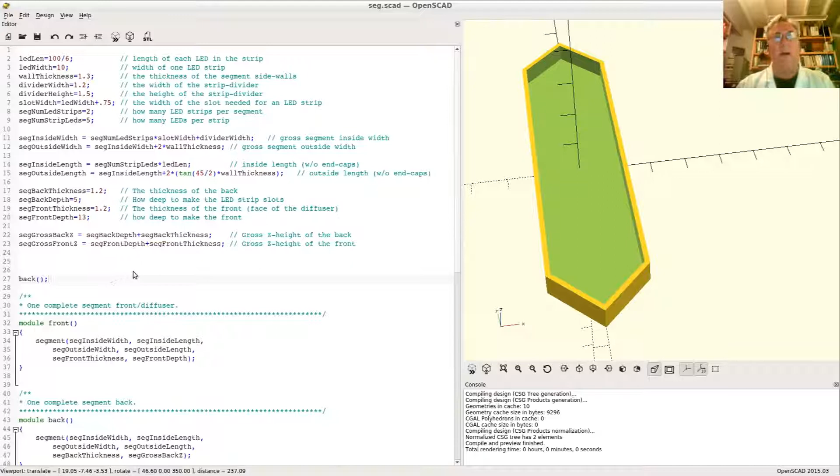How to design one so you can print it anyway. We're still in the design phase here. So here's where we left off. I added a little bit of doc to some of the functions that I didn't doc last time. And we're previewing the back of the segment here.

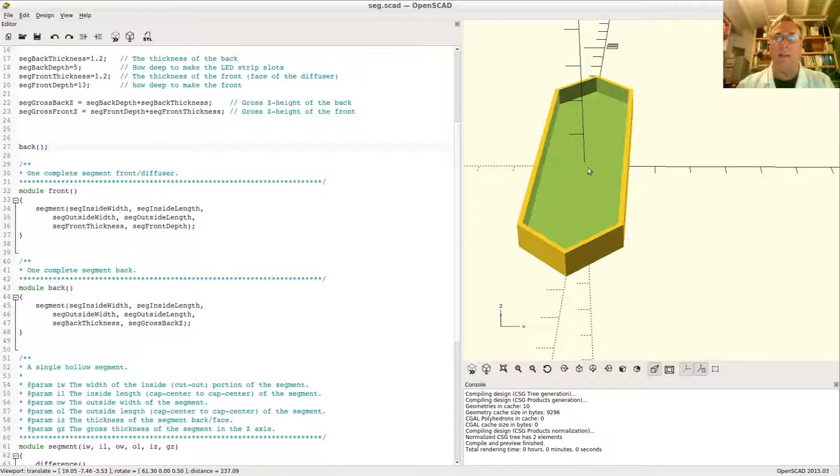Okay, so what I want to do in this segment is add the divider in here for the two strips that go in here so that the strips don't move back and forth or up and down. So in the back, it's relatively easy to do the basic thing that we want to do. So what is that? It's going to be a cube, essentially. And let's put it on center. Make it a little bit easier to keep the thing aligned right. And that's going to be...

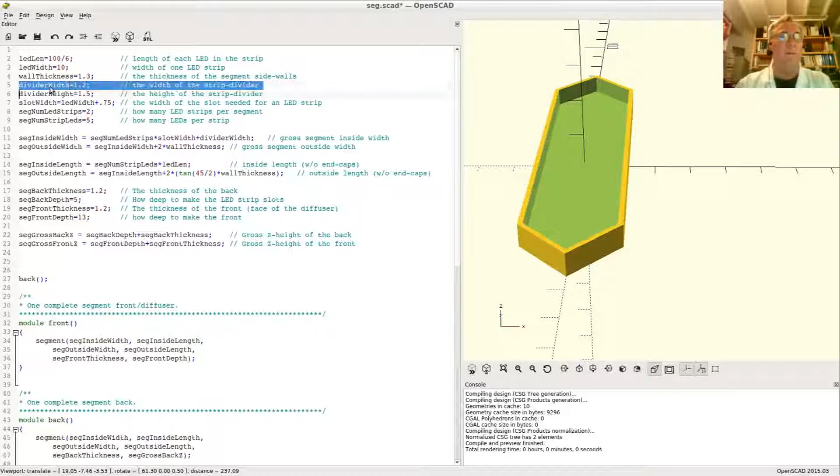I didn't mention last time, I added a divider height variable along with the width from the introduction there. So I got a width and a height. So the width is going to be the fatness of the thing in the x-axis. The y is going to be the length of the divider, which is going to be the inside length of the segment. So we have that right in here, the outside inside length right there. And the z is going to be the divider height that I just mentioned. I added up here.

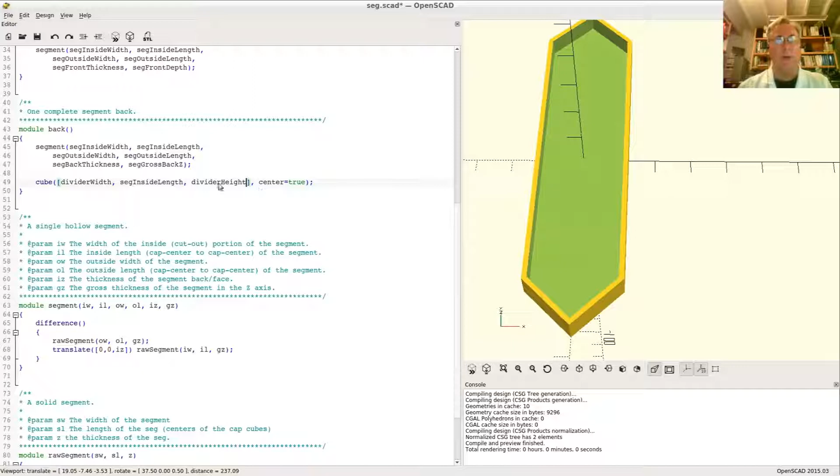Now, because we're centering this, it'll be printed centered on the origin. Let me put a marker in here. Let me highlight this, little debug highlighter. As you can see, it's not in the right spot. I got to lift it up in Z, but the question is how much. I need to lift it up more than the back of this segment. Here, let's do this just for fun. Let's do a difference here. Let's put like a cutting plane in here.

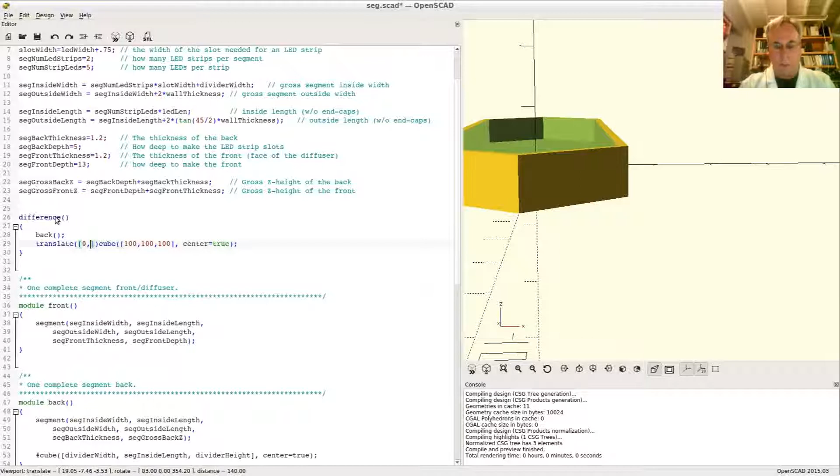Let's take the back that we're rendering now and subtract a cube from it that is 100 by 100 by 100. Center equals true. Then we'll translate it to where I want it to go. In X, we'll leave it alone. In Y, we'll move it towards ourselves, 50, so it will be in the foreground. What we're going to do is cut off this bottom half of the segment right at that axis there. And then the Z, we'll leave that alone. This should do it, right? Oops, I went the wrong way. I got to go minus 50. Fine. So now you can see where this shape really is.

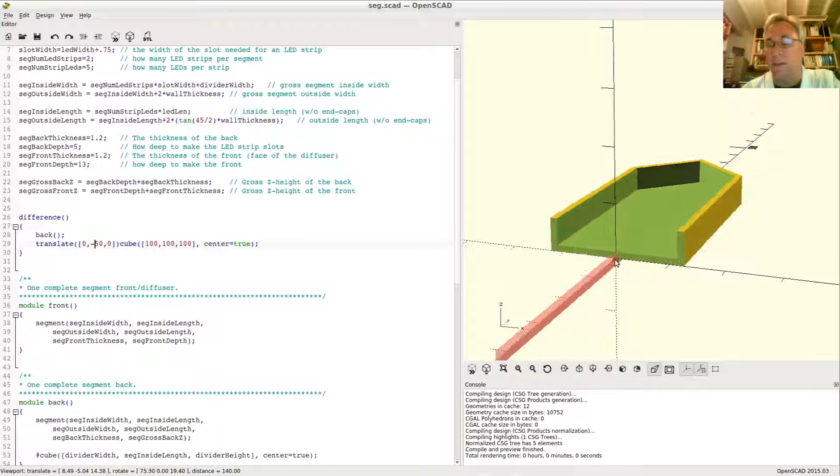Oop, I guess if you zoom in too close, then the previewer gets a little confused. There's a bug in OpenSCAD. Anyway, you can see where the divider is. It's clearly centered on the z-axis, and it's otherwise hiding inside the back of the back, so to speak. Let's leave this on for a minute and figure this out. So what do I really want to do? I want to translate. It's actually fine in the X and Y. We just need to lift it up in Z. So how high do we need it to go?

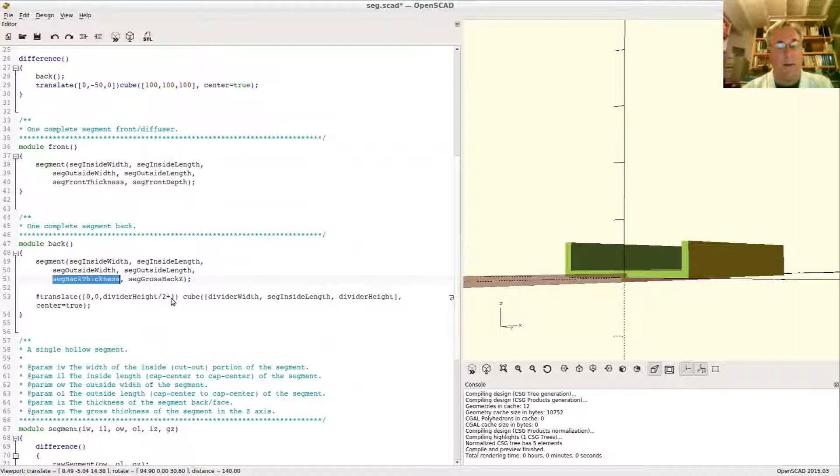Well, if it's divider height in Z, we need to come up that much over 2 in the Z. And we also want to go up to account for the thickness of the back itself. So that's the back thickness right there. So if we move it up now to here and preview it, clearly that is in the right spot if it renders it properly. Okay, so that looks pretty darn good to me. Let's turn the debug back off. Okay, that looks good. Let's do a full render to make sure it's not up in the air.

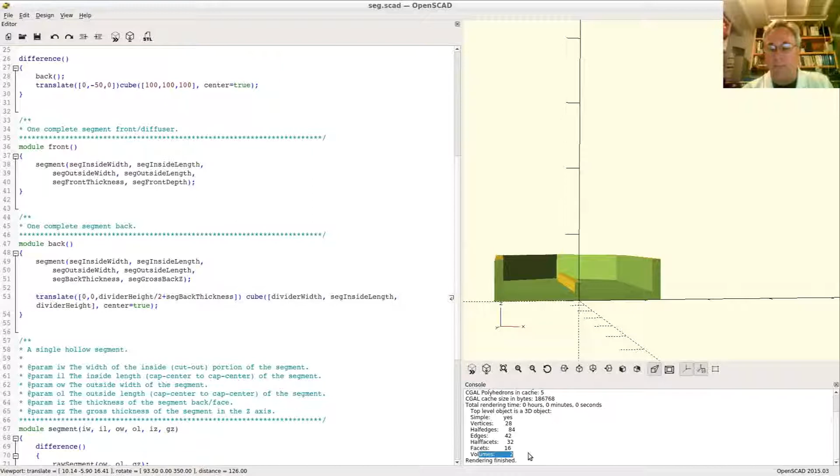The fact that I have two volumes right here means that it's not up too high. If it is up too high, that means I've created another volume. So let's go ahead and add 5 to the Z height. And clearly this is going to be floating in the air. It's not connected. So if you do a full render and look down here, it's got another volume, right? The inside volume of this shape, the inside volume of this shape, and the outside volume of the whole thing is what OpenSCAD is counting.

So in other words, it is lying down on there. There's not a tiny little gap between there. It might actually be that it's too far down low. I might have made a mistake and it really is dipping inside.

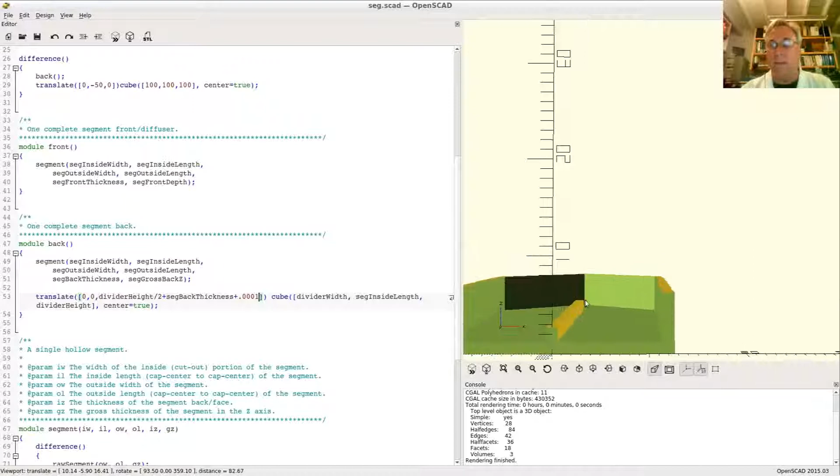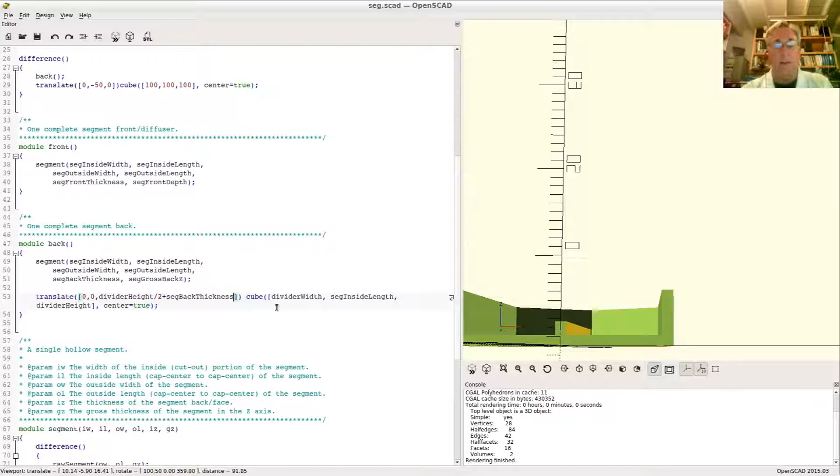We can figure that out by adding some really tiny number here like that and say, if I lift it up even the teeny bit, is there a gap in there? And this just changed to a 3. So yeah, there is a small gap there now, and there wasn't when it was just like that. Full render. So clearly that's the proper place for that to be.

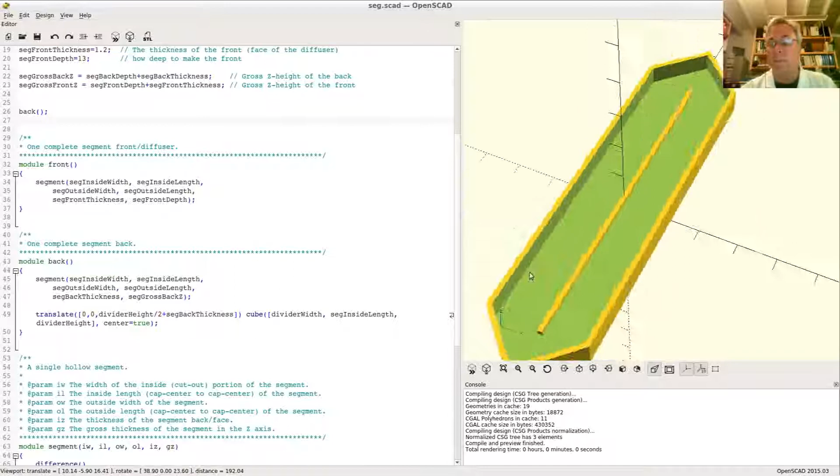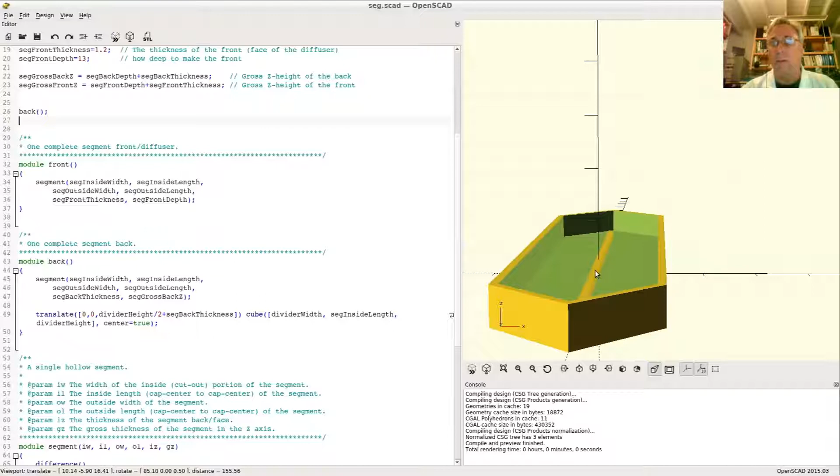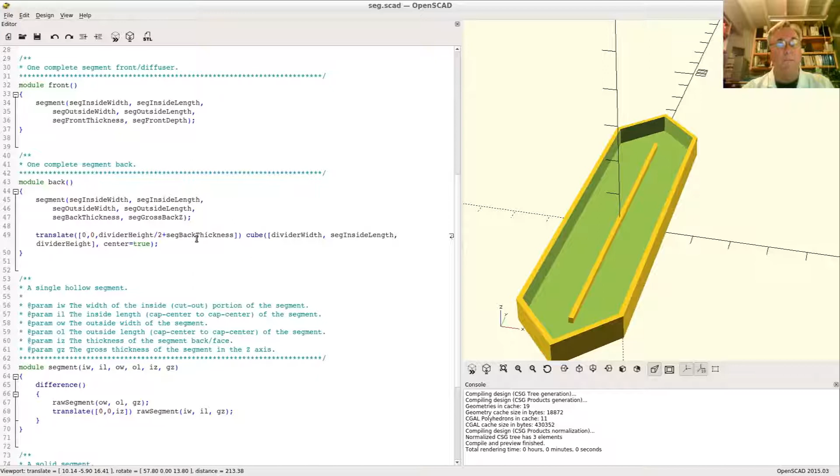And yes, when I built a prototype using this particular design, mine did. They popped up in one of the LEDs, and then it looks terrible because the diffuser can't deal with it if they're not laying flat. It just looks hokey. So we want to put a cap on this, sort of like a T-top.

But if you literally put a cantilevered T-top on this, you couldn't 3D print it because it would be 3D printing in the air. You can have the printer add support and do it that way, but then you need to remove the support, and that's a pain in the butt. Oh, and then you can use water-soluble support. No. No one cares what it really looks like, by the way, because it's going to be inside your LED segment anyway. So what I did was this. I took and put a cylinder on top of this.

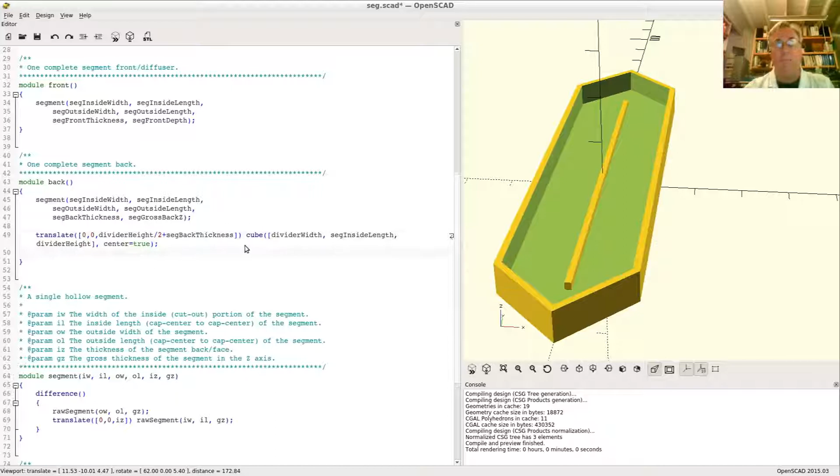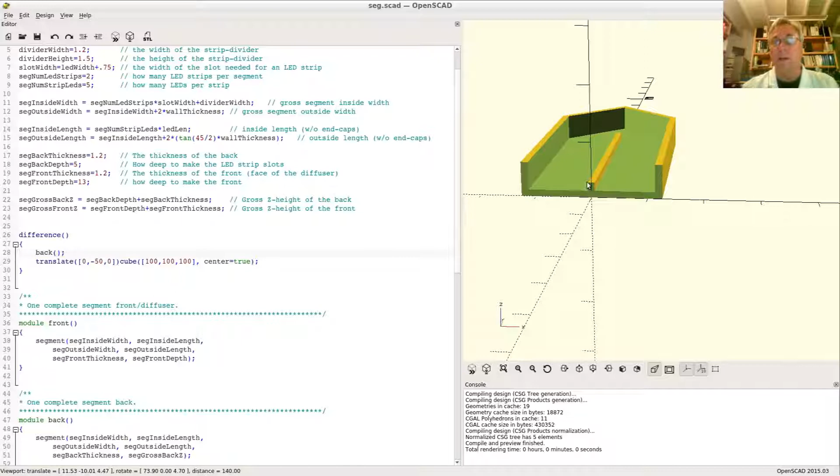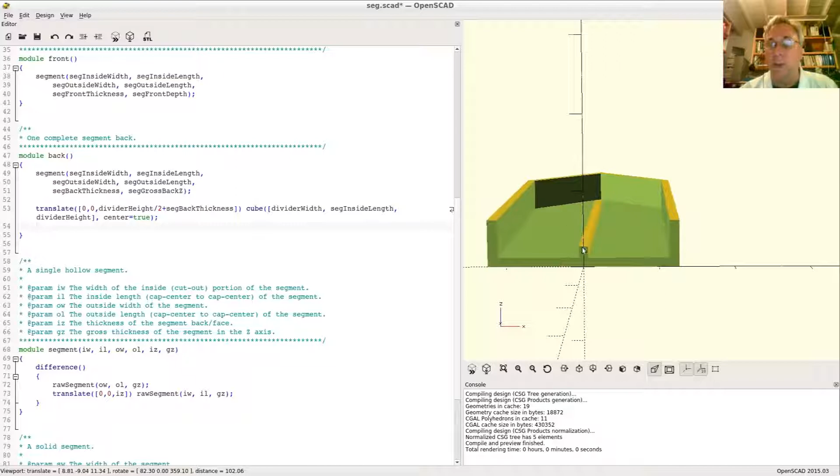So when the printer prints it, each time it comes up in the Z height, I should have left that debugger thingy on. Let's go ahead and put this difference back in. I just did a few undos because we're going to want to have a look-see at how I put the top of this thing on here and see what's going on with that. So let's put a cylinder on that. I can only zoom in so far, I guess, but actually, if I do a regular render, it should be fine.

Okay, there we go. If we zoom in and we put a round thing on here, what'll happen is as we print it, as it gets higher and higher, it'll print only like one line out here, and it'll have a chance to stick to this edge. And then when it prints the next height, it'll put another line out there, and so on. So it'll have a rounded shape, so that it won't try and print the entire cap all in one layer, because the printer, when it extrudes out here, it'll just fall down on the floor and make a mess in there.

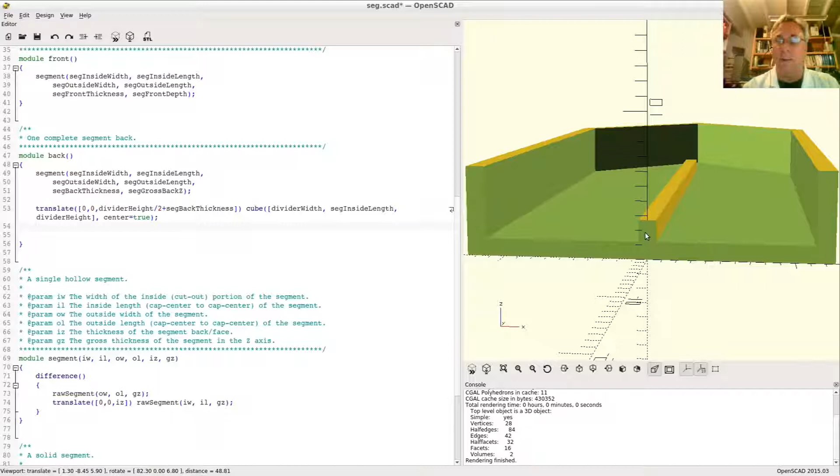So you can do this right now. This translation puts this cube here, this cuboid shape, on center. I'm looking at right there. Okay, if I put a cylinder on here, I would want to put the cylinder obviously up higher than that, maybe center it on here, and that's what I'm going to do. So in order to translate from here to here, I don't go to divider height over 2. I'm going to go to the full divider height plus the back thickness. That's where I want the center of my cylinder to be.

And I'm going to just sort of guess on this one. I'm going to make the cylinder diameter 4. The height of the cylinder, you might think it's going to be fine. Let's go ahead and make it the same as the inside length. This will be problematic later on, you'll see. We also need to rotate this. I'm not sure which way to rotate. We want to rotate it in the x-axis. And right-hand rule, so we want to go 90 degrees in X.

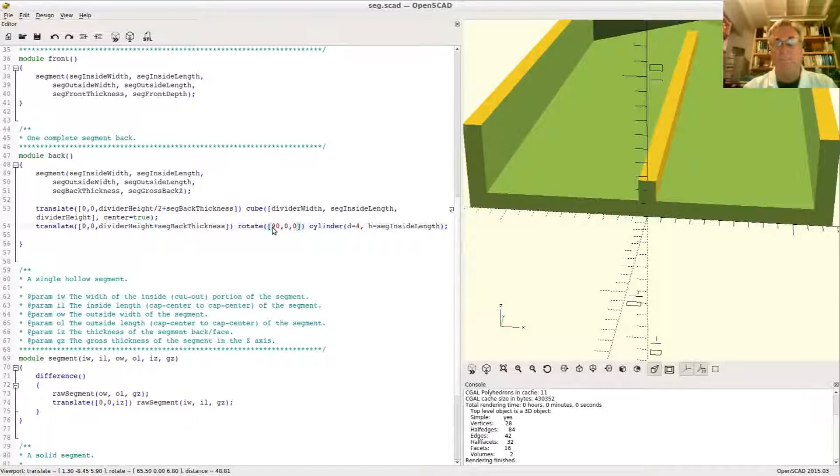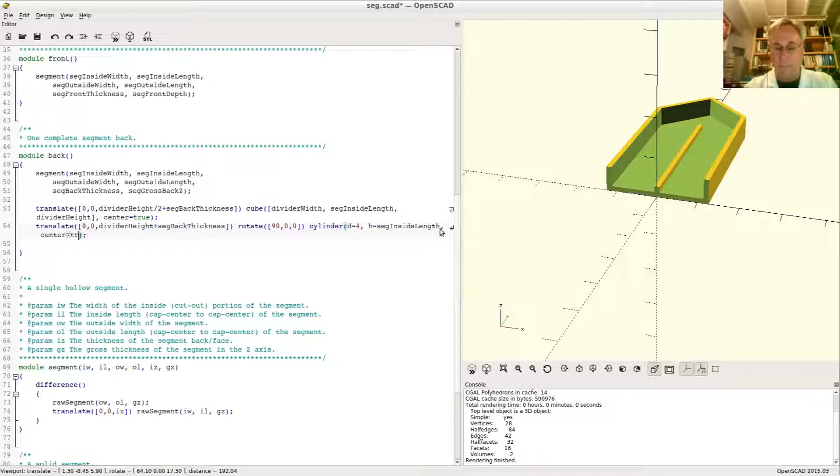And now the previewer is overly zoomed in again. Let's go ahead and render it. Now you saw when it was in preview mode that it was sticking up. It's actually over here because I forgot to center it. All right, it's also looking really big. It doesn't have that many facets on it. So that's too big. Not really. It's not really too big. It's just too big vertically. Let's squish the thing. But let's get this other stuff right first.

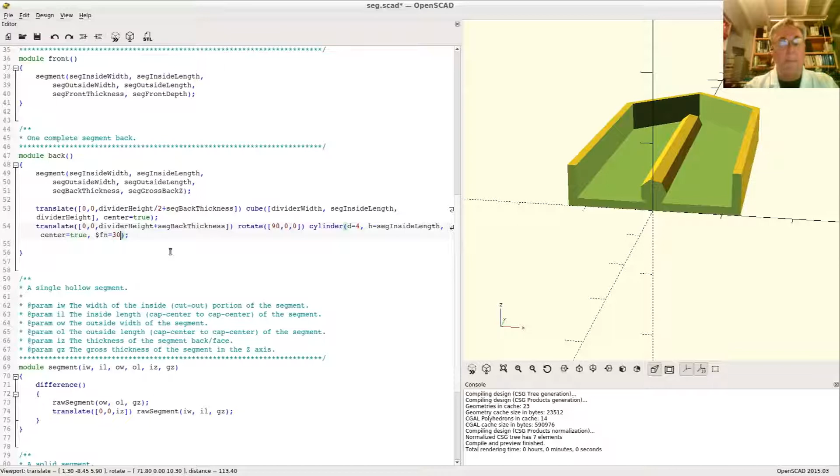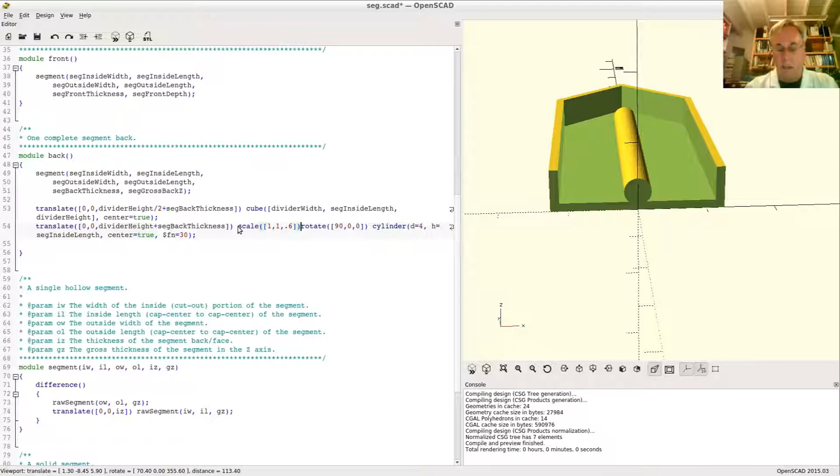First of all, let's give it some more facets. Let's give it 30 facets. Okay, now we got some resolution on there. Let's squish it. So after it's been rotated, we can squish it in the Z. Let's scale 1 by 1 by, I'm going to just guess, 0.6. I think that's what I did one other test. Now that's pretty darn big.

Do a full render. Okay, zooming in now. Now you can see the LED strip can sit in here and this will hold it down. That's pretty darn big though. Let's go down to about a 3 on this. Do a render. That doesn't look too bad.

If you make it too small, it won't hold the LED strip down, because remember when we defined this width here, which I call the slot width in this program up here, it includes this 0.75 millimeter fudge factor. So if this thing is 0.75 millimeters wide right here, the LED strip will actually be able to fall through here just fine and dandy. So a quick back of the envelope, if this diameter is 3, this is really only 1.5, and actually, surprise, that is not really big enough. So maybe we should put it back to 4.

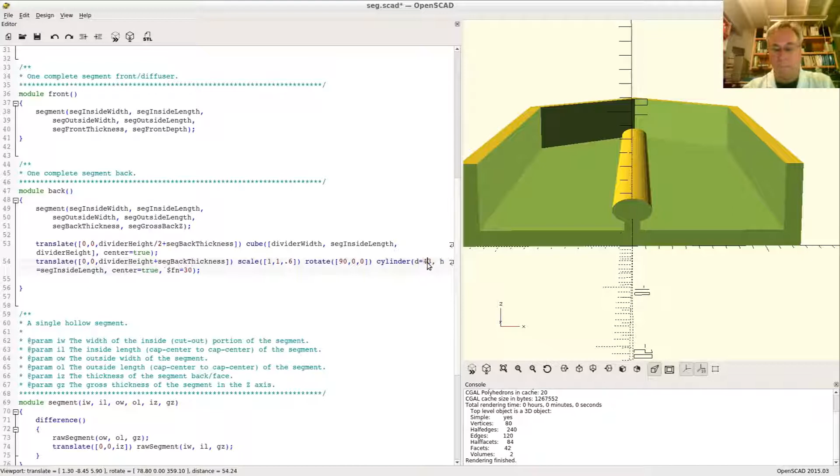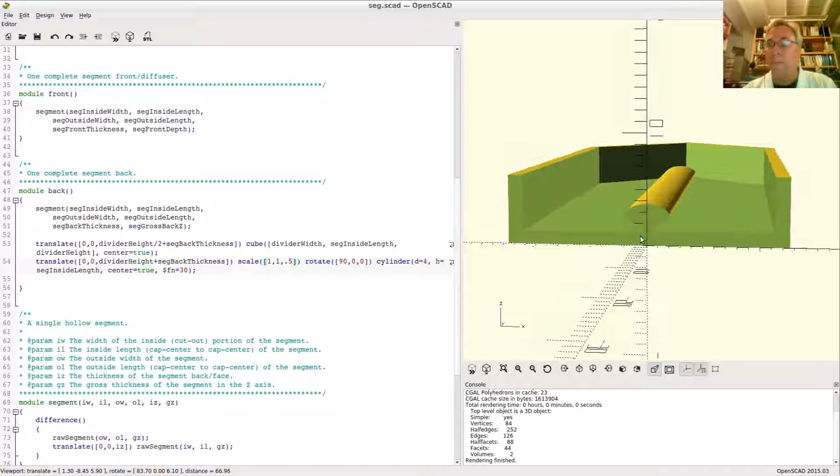There we go. And let's squish it a little bit more. Maybe 0.5 is better. We're getting closer. That's not too bad. If I do it too much, it'll become too flat underneath here. Like this might be too much. See how flat that is? The printer might try to print all that in one pass with many extrusion paths running longwise on here, and then it wouldn't work. So that's probably too much. I'm just guessing. We'll know more when we actually print a test.

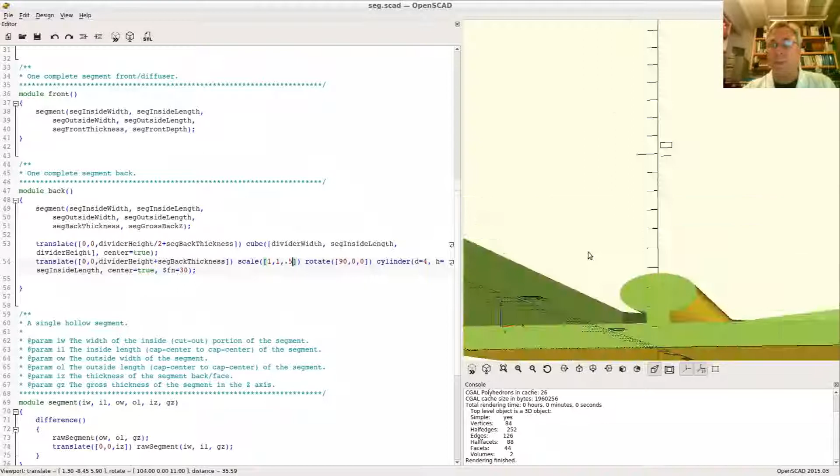This is still pretty round. So when the printer prints this first layer in here, it might make one overhanging cantilevered pass, and then the next one will have another one, and so on till it gets out here, and then it'll start building up this. So this is probably fine. You got to experiment with this and decide what works best for you. That definitely will do it.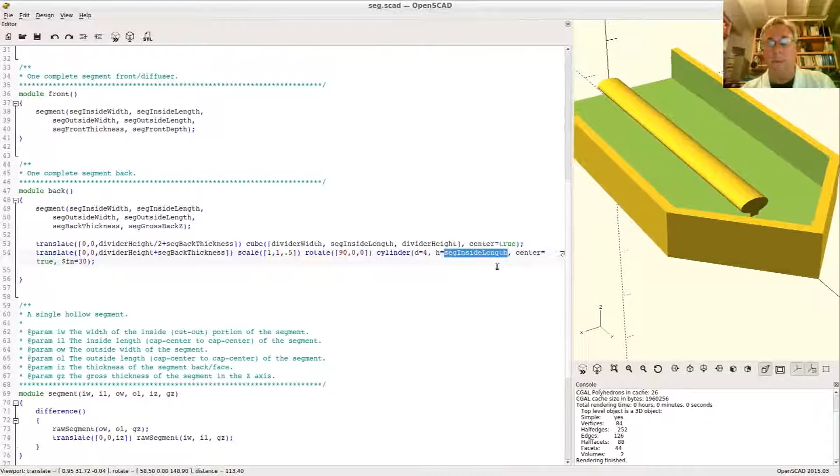Now there's something else that I happen to know from when I was playing around with my printer and working on the same thing. If you actually do this, see how the end is all together, because I made the height of this cylinder equal to the inside length of this segment. Printing all this together, my printer, when it comes to the end and it turns around and comes back, it will momentarily pause here and then come back. And what happens is you end up with a big blob on the end of this, just because the head stays there.

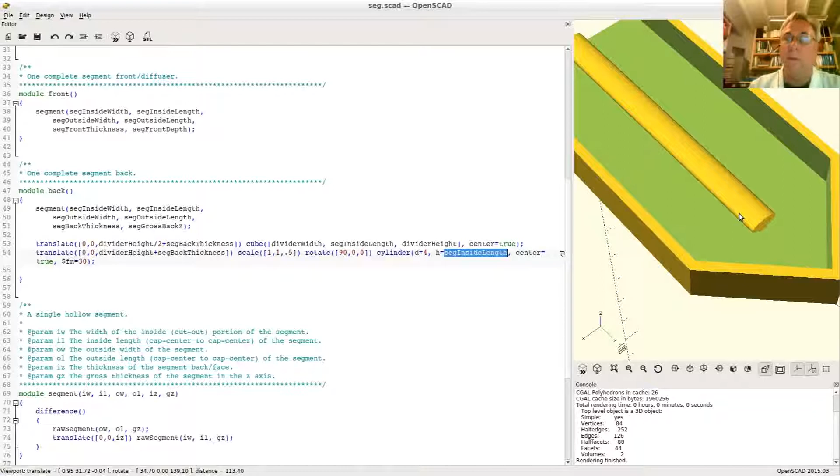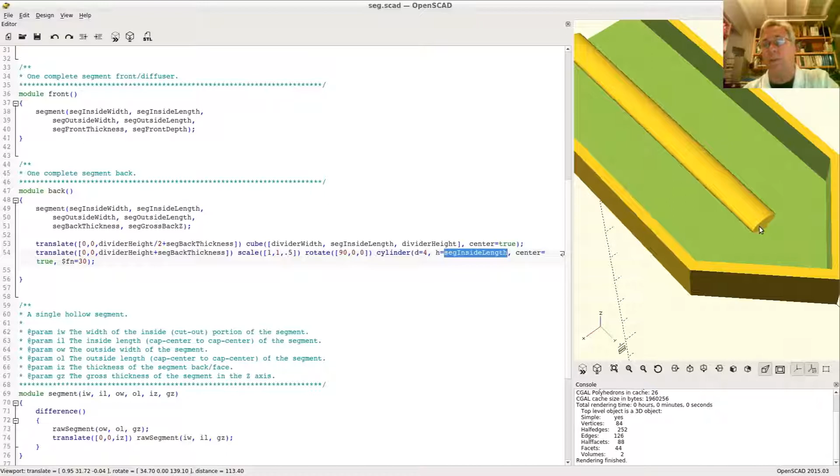Even if you do a retraction or something to try and stop the extrusion, for a short while, it will still be extruding because it's got that pressure to get rid of in there. So for a very short time, it will spend pausing on the end, and this will get thick and ugly and blech. So what I did on mine, after I did a test and found that to be the case, I subtracted a little bit of distance. Now, technically what you want to do is base it on your LED length, because if you make shorter and shorter LEDs, you don't want to subtract so much that you don't even have one of these if you only had like one LED, right?

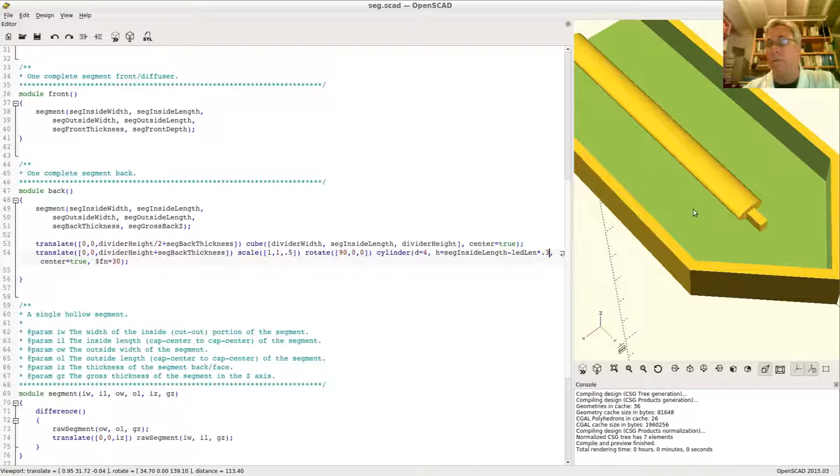So you want to say LED length times like maybe 0.3 or something like that. So even if you said I only want one LED in here, this would still be 1/3 of an LED long, because you're going to back this one in a third, back the other one in a third, and then it'll remain 1/3. So that's a pretty reasonable choice there, and having it like this is fine. That'll come out pretty good for you. And this is pretty decent.

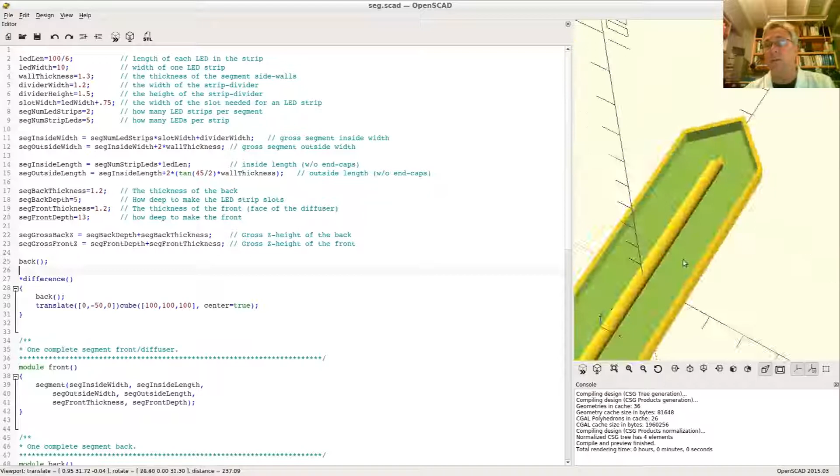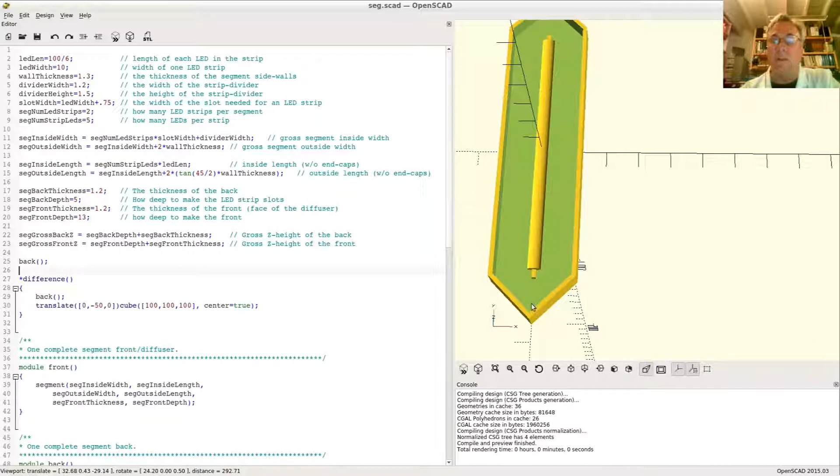Now we can go ahead and remove this difference again. Actually, I'm going to go somewhere with this. Let's go ahead and put a star in here to get rid of it. That comments out this entire statement, and I'll just put another one right there. Boom, there we go. Now we have the whole segment rendered. Move this to the left a little bit. And you can see the LED retainer blob on here, the top looks really reasonable there, okay? And this is literally roughly how the one that I printed is set up here. And this works on my printer anyway just fine.

You're going to have to experiment with yours to see if you have the same kind of problems I had with the extruder, putting a little too much material on the ends of these.

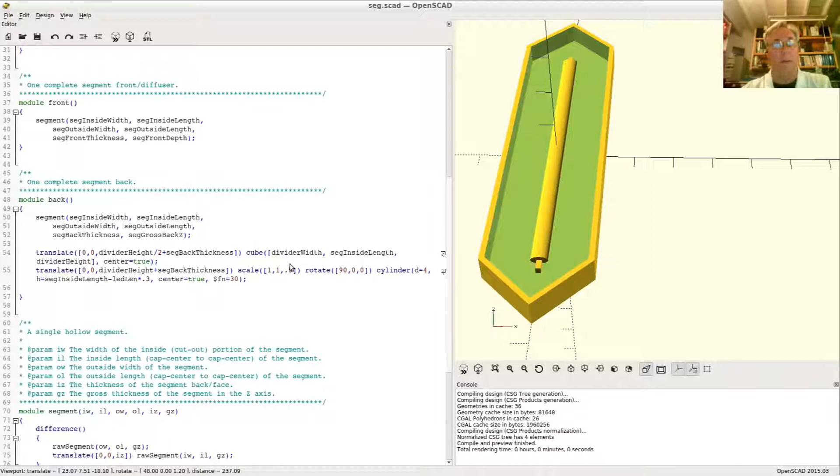So, if you don't know what this means, just comment out this whole difference and all this stuff inside. Okay. Now, this is all fine and dandy, but it would be nice if we could change the number of strips in the LED. So now the problem will be if I change it to one strip, you don't want a divider in there if you have only one strip. This doesn't belong there. And I'm also looking at this.

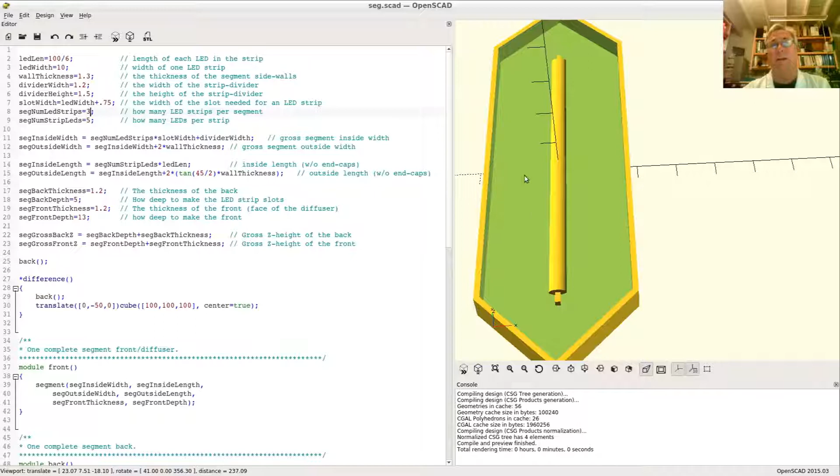Clearly, if you have only one strip, the inside width is equal to the 1 times the slot width for the one LED plus the divider width. It doesn't need to have a divider if you only have one strip in there. So this is okay for the original design, but if you want to be able to tune this, so maybe I want 3 of them in there. Clearly that's not what you want here. You want to have 2 of these dividers in there. So if we make this thing more tunable, more useful, let's leave this set to 3.

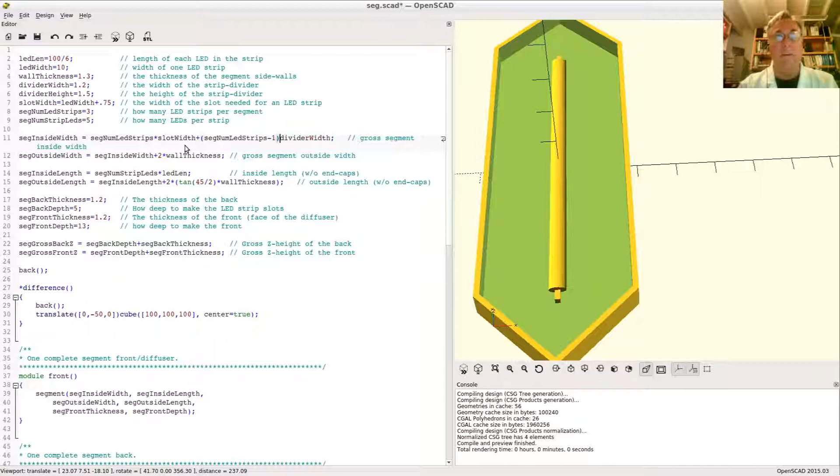What you really want to do is say, look, the total inside width is going to equal the number of strips times the slot width plus the number of LED strips minus 1 times the divider width. That is actually the correct width. Now, if I only have one of these, it's going to be 1 times slot width plus 0 times the divider width. This is the proper width now for a 1 strip segment.

All right, so let's put this back to 3 and then go back to where we're putting this in here and put a little code in there that'll create the right number of these things and put them in the right spot. So how do we do that? Well, I can put a for loop in here. And I'm going to say x equals, and I'm going to create a range of values for x. And then for each one of those, I'm going to put one of these guys in there, move to the x location that this will generate, and center these dividers on that x.

All right. So how is that going to work? Is this otherwise all fine and dandy? I think so, because originally it was just 0, and that's where you wanted it if there was only one. But what you really want is if there's 2, it needs to go over here, which is seg inside width divided by 2, negative of that, right? So we're going to come over here and then move over to the right, 1 slot width plus the width of the divider, or half of that width, that is, and then put one there, and then move over again that much, put another one on there, and so on. And do that for the number of strips minus 1.

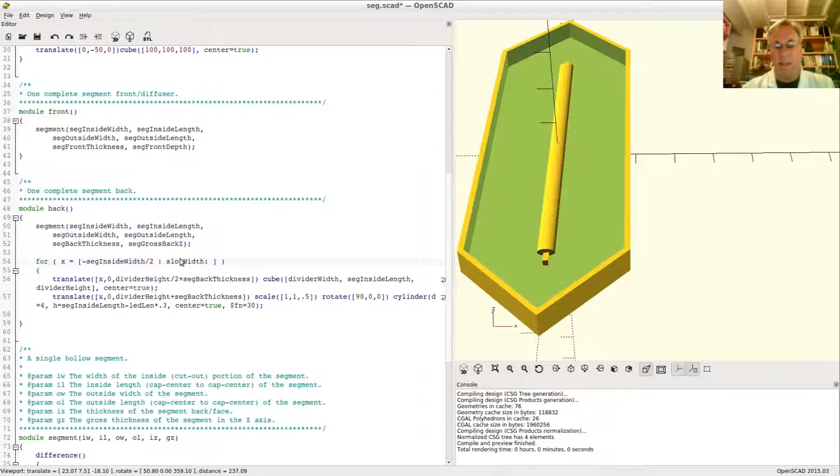The slot width is up here somewhere. It's the LED width plus the little fudge factor that makes it a little wider so that when the 3D printer is imperfect or imprecise, we don't end up with too small of a slot and the LED strip doesn't fit in there. So every time we do one of these, we need to move over slot width plus the divider width. And we're going to end when we get to plus seg width over 2.

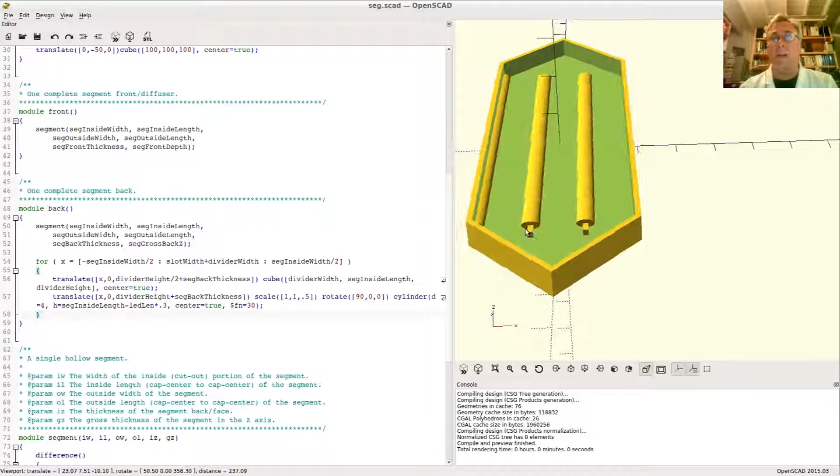So for the most part, this should work if you finish putting your closed curly down here. All right, so I said I want 3 strips, and this kind of makes sense, except somebody put an extra one over here on the left, and that actually makes sense because I started at minus seg inside width over 2 and said put one there, move over, put one here, and so on. So I really don't want to start there. I want to start there plus where the first one belongs, which is going to be plus this thing here.

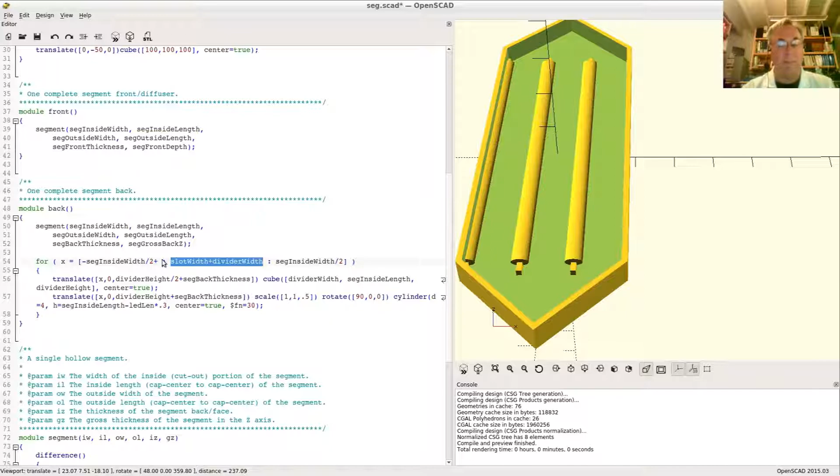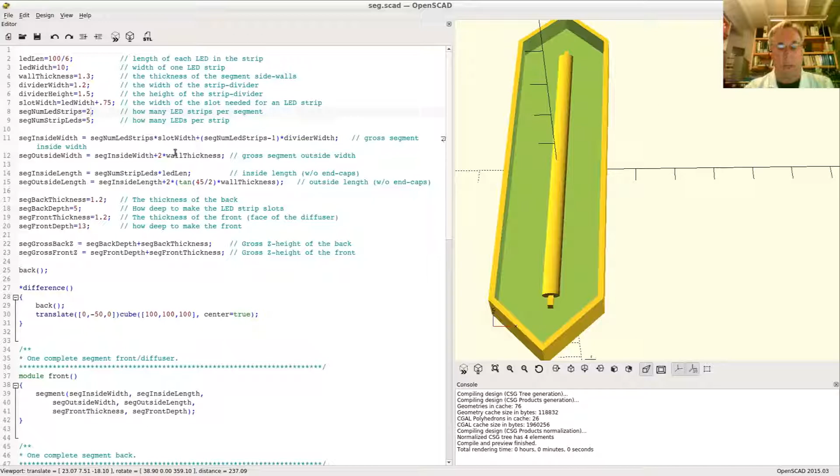Now I got the 2 dividers that I really want. Now, are they really in the right spot? I'm not 100% sure, but we can do a quick check and say, look, if there's only supposed to be 2, this better be in exactly the middle, and it is. So there's a rough clue that it's probably okay. If we have 1, there better be none of them, and that makes sense, right? Because I said start at minus segment over 2 plus something, and end when I get to seg width over 2.

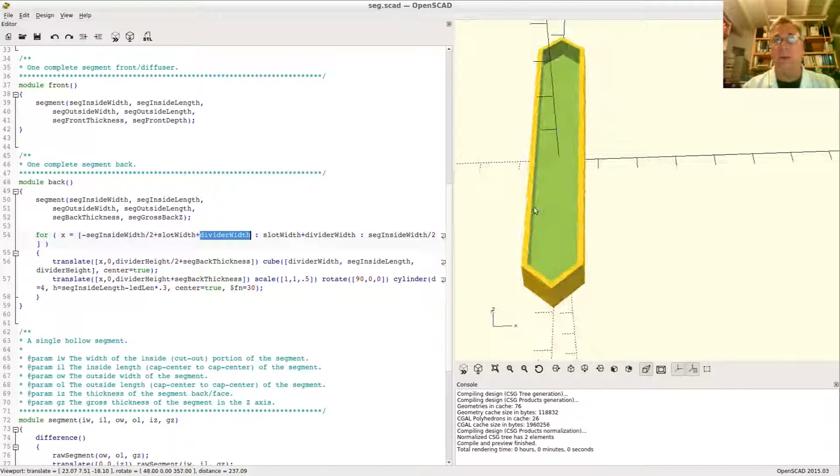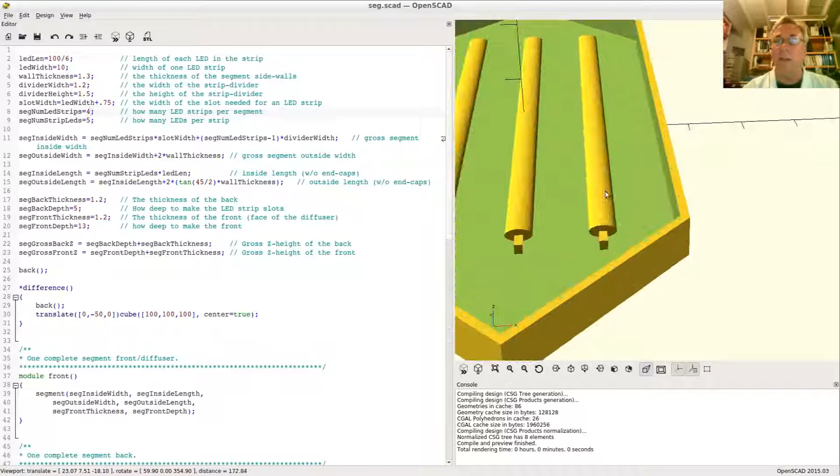Now, seg width over 2 is really going to be equal to slot width without the divider width on it. So that's why you don't get any of them over there if you go back and check the math. So I think this is correct for this. So if you wanted to put 4 in there, you should see 3 dividers, and the middle one should be exactly in the center. And you know what? It is not. So we're not quite out of the woods. Something's a little bit off here.

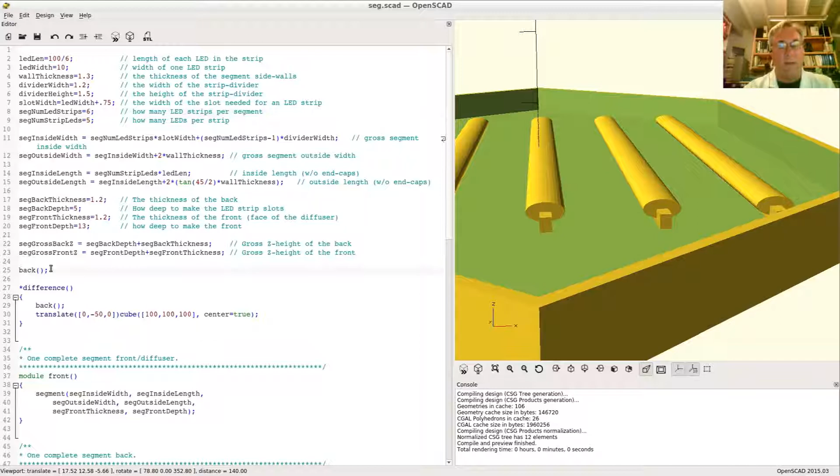If we zoom in on that, clearly that's not in the middle. In fact, if we put more of them on here, it'll probably get worse. Of course, we need an even number to get one in the middle. You see how suspiciously it's to this edge. It's not in the middle, so we're probably not starting right. Let's now go back, and this is what I had in mind when I said let's keep this around and cut this in half so we can get a better look at how the alignment is. I did a full render so I can zoom in without the previewer getting confused. So that is definitely the left edge and not the center that it should be.

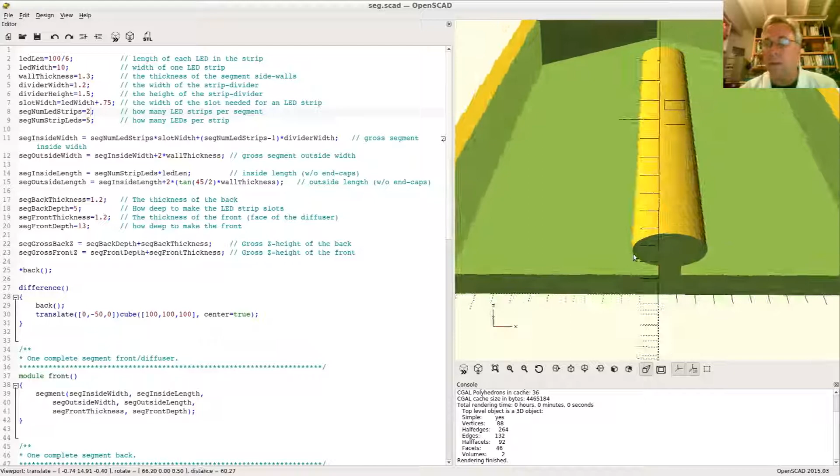Let's go back to 2. 2 is also the left edge. Oop, now I got to do a full render again. Whatever that bug is, annoying. So, okay, this is easy enough to solve. It just means that I didn't start it in the right spot. So it's minus segment over 2 plus slot width plus the divider width. This is the problem here.

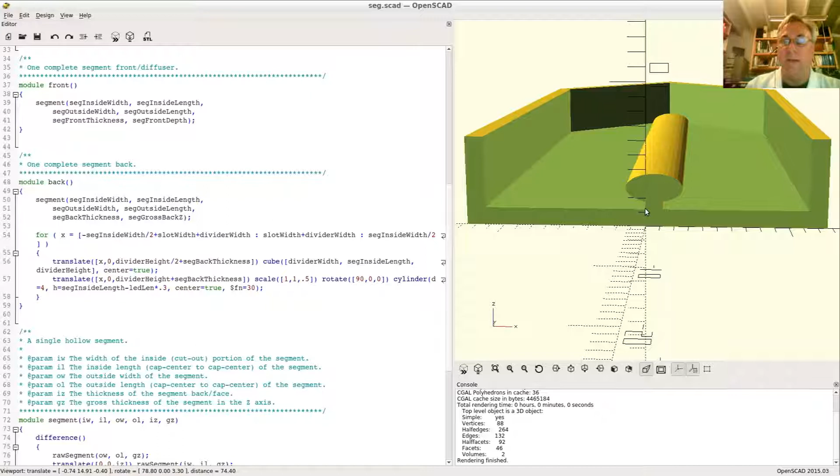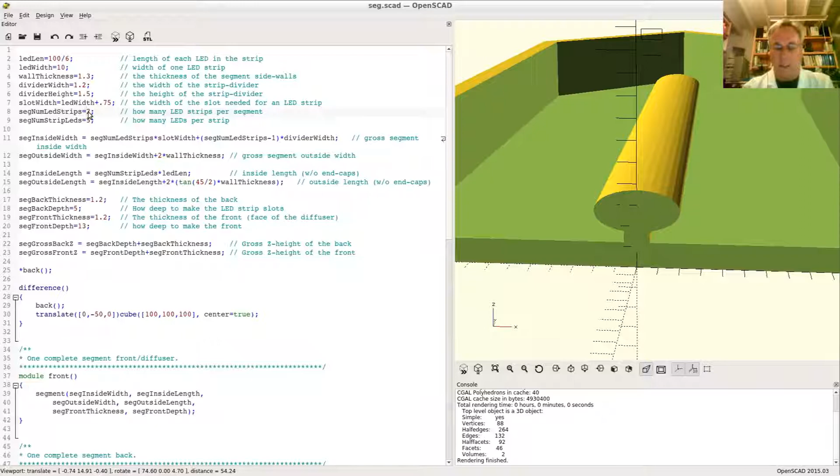When I say go over here and then go over the slot width plus the divider width, what happens is I don't want to go over a full divider width. I want to go over plus the divider width over 2 for the first one. This is fine for the increment between each one of them, but the first one needs to be to the left by half of the divider width. And then the rest can go from there. Now this is on center. Clearly that's okay. Let's go ahead and go for 4 because that'll have one in the middle as well.

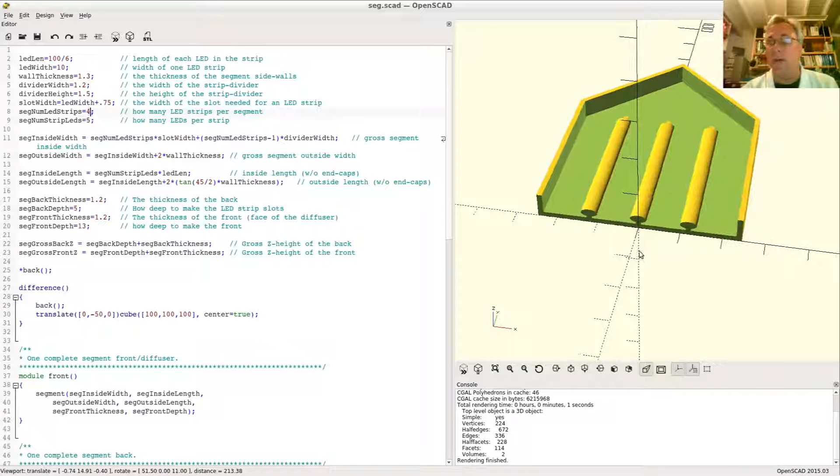Let's go full render here. That looks pretty darn good. So I'm pretty sure that's fine. Time will tell when you put your LEDs in there, when this one fits and that one does not, and so on. If that happens, you'll know what code to come back to down here. So you're going to have to definitely print some test prototypes and get these all tuned up. Again, we have volumes equal 2, so they're not up in the air and doing anything weird like that. This is all good. So I'm pretty sure that's what you're going to want to do for your tunable number of strips so that you have the right dividers in there.

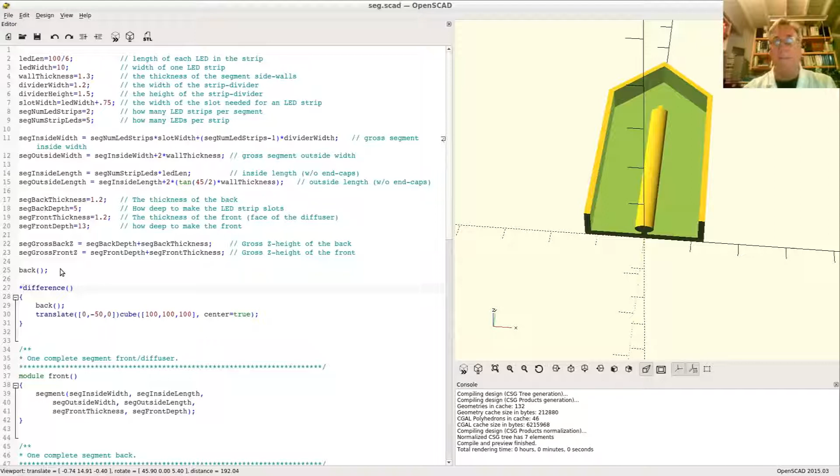So next time we will do more work on the snap-in feature that'll allow the front and backs to snap together. Oh, I also got to knock these sides out, but I think this video has gotten too long already. We'll do another one where we talk about how to knock these corners out so when you put them together, the wires can flow together into this segment that might meet with this one over here.